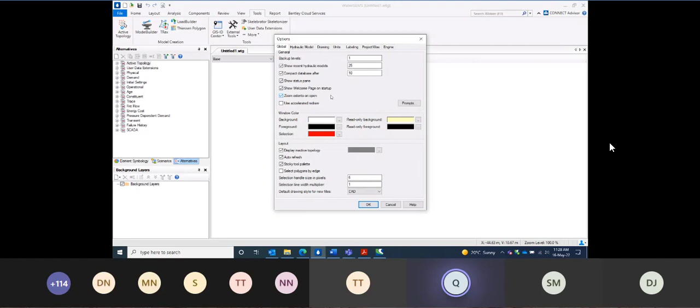Okay, yeah, then continue, Dean, yeah, units. And yeah.

Default unit system for new hydraulic model, SI. Reset defaults, SI.

Yeah, and that's it, so okay.

Yeah, that's okay, excellent. So back to home.

What we're going to do now is import some files so we can build our model, and then we're going to modify the model, run it, check the results, and rerun it with some changes.

Home, and then all the way out here, model builder.

In model builder, go ahead and select new.

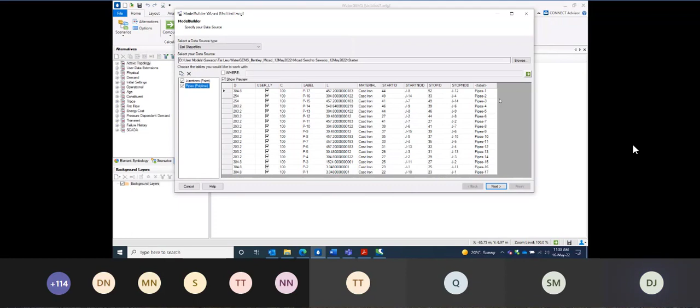Okay, next, make sure you change the coordinate system to meters.

Yeah, okay, and next. Yes.

Oh sorry, just go back. Yeah.

Just make sure this one is checked: create nodes if none found at endpoint. Yeah, and next.

This screen we don't need to worry about, because this is regarding model building for a second time. So next.

Yeah, this is all correct. Current scenario and label is correct. So next.

Okay, so now we need to do table type, junction is correct. And then key field we want label.

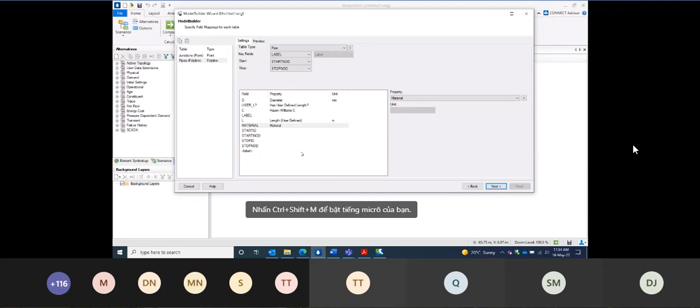That's all done? Yeah, please wait a minute.

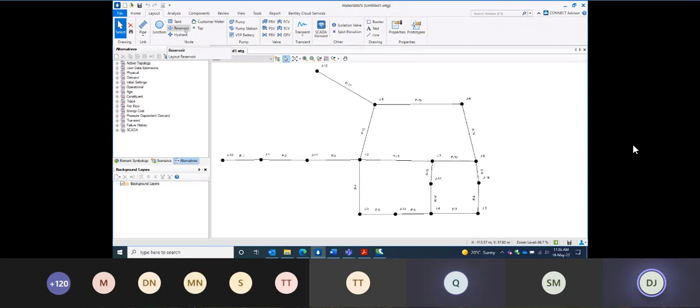And then junction 10 out on the left, click right on top of it. It says, would you like to morph junction 10 into reservoir? Yes.

Yeah, this way. Yeah, I have explained for SAWACO.

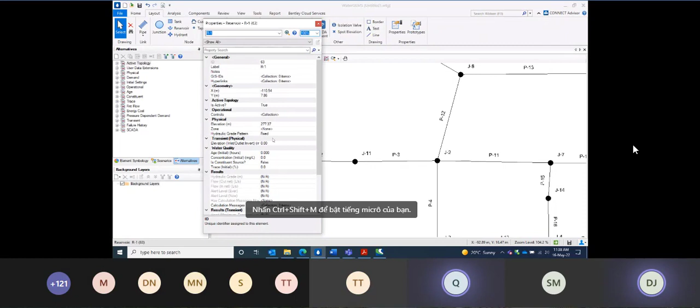And we need to change the elevation. So the elevation here needs to be changed to 289.56.

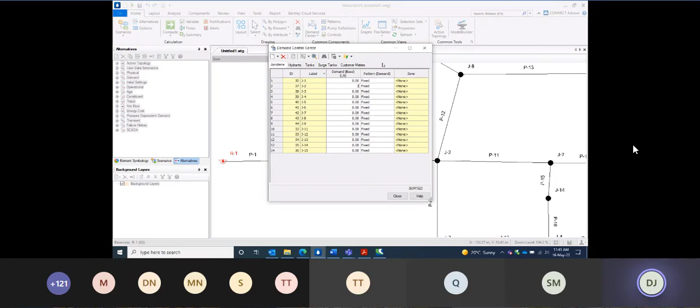And now we need to fill out the table. So you need to copy down these values. Done already? Yeah, done.

So you can close that down, and now we need to morph the other elements. So the next one is on the layout tab again, and pump.

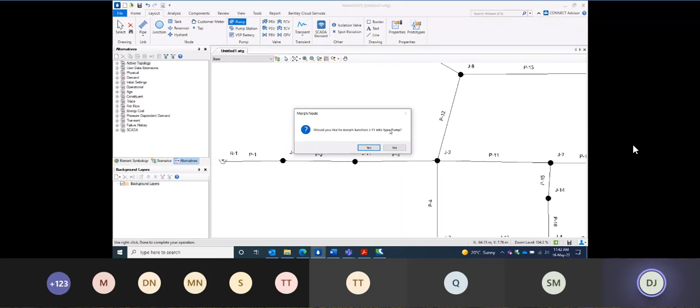Pump is junction 11. So click on top of junction 11. Would you like to morph junction 11 into a pump? Yes.

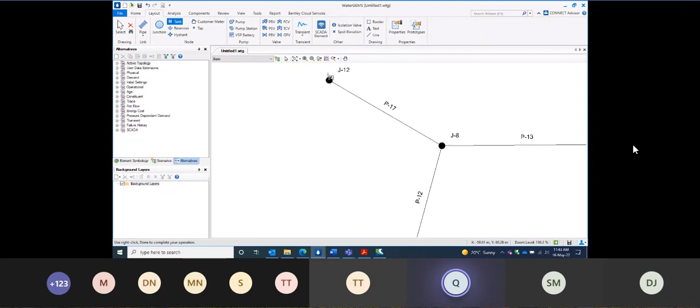Okay, so if we zoom out, and go back up, this time tank. The tank is junction 12. Go ahead and click on junction 12. Would you like to morph? Yes.

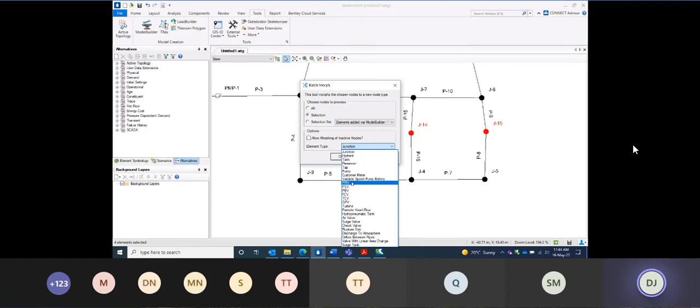Okay, so go back to the select toolbar. And then need to use the control key. So hold down control and select 13, 14, 15. And then go to Tools, More, Batch Morph. So open up Batch Morph and Selection, and the element type that we want to morph to is PRV. And then OK.

Yeah, okay. Yeah, sorry about that. Yeah.

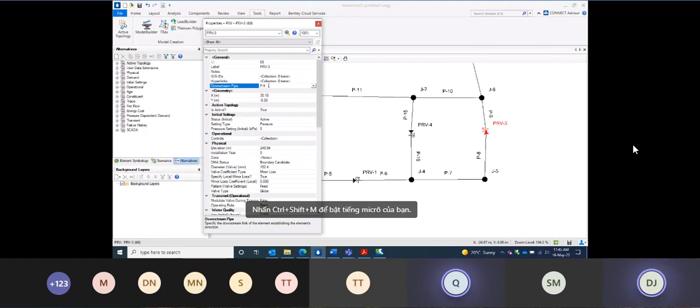So now we need to make sure that the PRVs are facing the correct way. So you come over to PRV 3 on the right and open up the properties. See the downstream pipe here is pipe 9, which is facing the wrong way. So what we need to do is reverse it. Go ahead and click reverse, and it will turn it around so that it's now facing pipe 8.

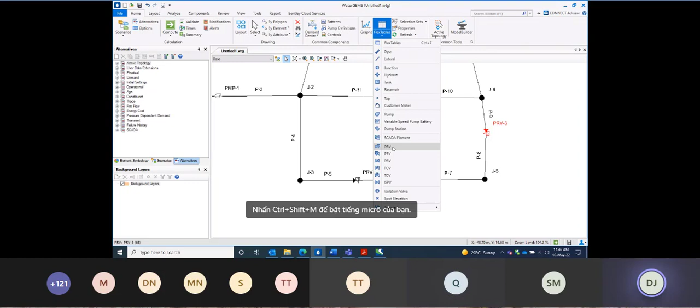Okay, so now we need to use the flex table to put in some values for the PRV. So if you close down the properties and then go back to the home tab, and then flex tables, PRV.

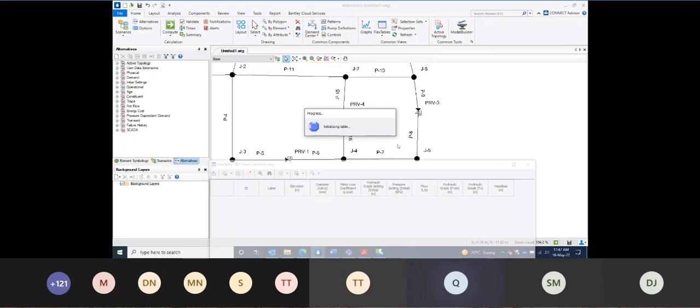Oh. Hang on a sec, just change mine back to a tank here. Okay.

So now we need to put in the hydraulic grade setting, and also the diameter of the valve. So the diameter of the valve for all of them is 100. And then the hydraulic grade setting as well.

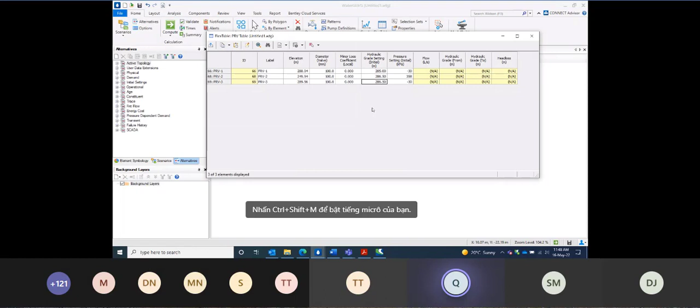We need to check the elevations. So, 249.9, 253, 253.

Yeah. All done? Yes, all done. Okay, so close that down. Sorry, mine are the wrong way around. I'll just... no.

Yeah, it's fine. Okay, so now we need to go and put in a pump definition. So next to Demand Control Center, we find pump definitions. And then create a new one. And then we need to enter some values.

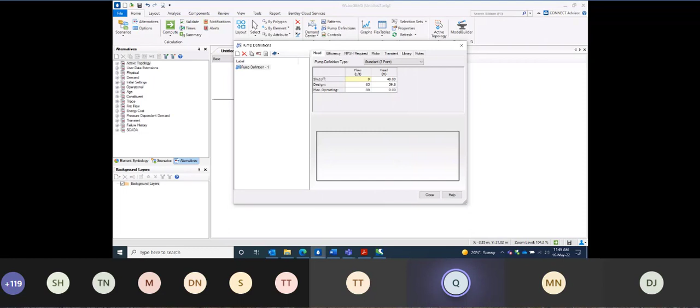Okay. So if that's done, you can click close. And then go to the pump. Open the properties. Yes, and set the pump definition to pump definition 1. We also, so once that's done, that's all. You can close down.

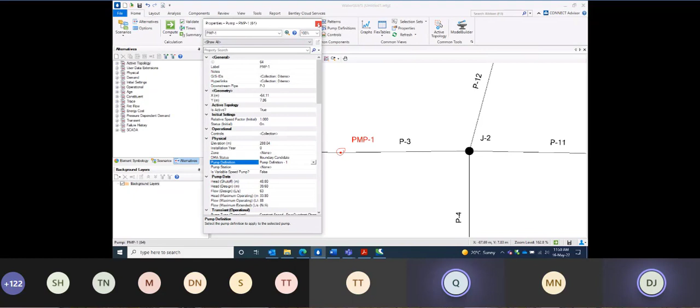And then go to the tank. Yes. So the tank, we need to enter the elevations. So you need to copy down these.

Yes. Okay, so yeah, okay, yeah. Once you've entered all of those, you can close that down and then click compute.

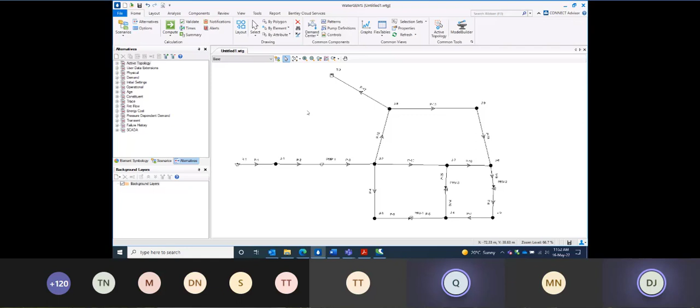Yes. So now we can look at some results. So the first thing that we need to notice is whether or not the tank is filling or emptying. Yeah. And then we also need to notice down here whether PRV3 and PRV1 are actually operating.

Yes. Yeah. Okay, so we're ready to move on to the next portion, are we? Of this workshop?

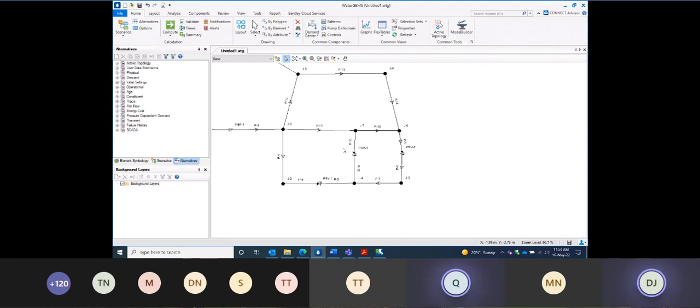Yes. In this session, we can finish. Sorry. Sorry. For this... yeah. Are we finished here? No, there's still a little bit more to go. Yeah. Okay. Yes, please. Okay.

So now what we're going to do is add an additional demand to see what happens to the system. So as you can see, the flow is going into the tank from the arrow, which means the tank is filling. And so what we want to do is put an extra demand on, and then see if our tank is still filling or if it's emptying.

Yeah. So on the alternatives tab here, which is already docked on the left, you want to go to demand, and then expand demand from base demand. Yeah. And then right click new child.

Yeah, so the child, I'm going to say average plus industry. Yeah. And then double click average plus industry. Yeah.

And then go and find junction 5 and highlight junction 5. Yeah. Change the demand base from 3.2 to 95. Yeah. Close that down.

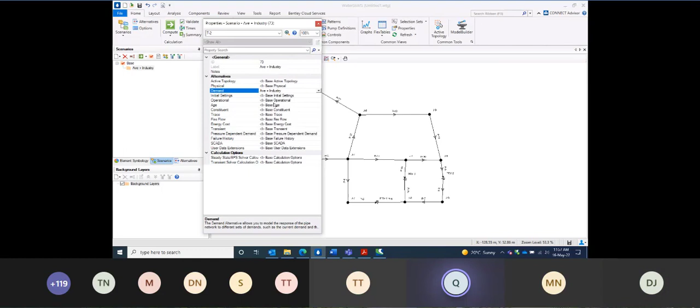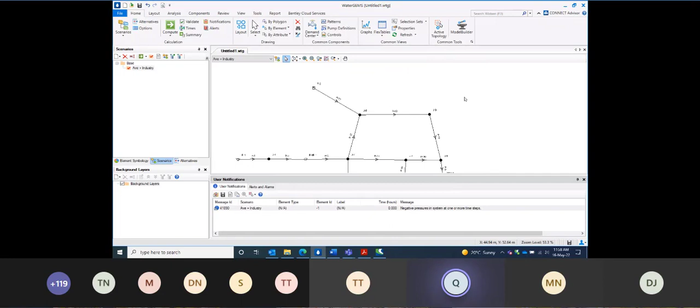Close that, and then right click make current. And compute. Yeah. And you should find that the tank is now emptying.

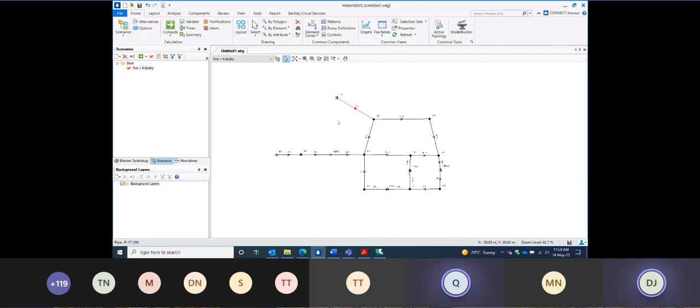And so that's it. That's the finish of the first workshop. Yeah. So are there any questions or anything, or should we take a break now before the second workshop? Yeah, okay. Yeah. Please take a break in about 15 minutes.

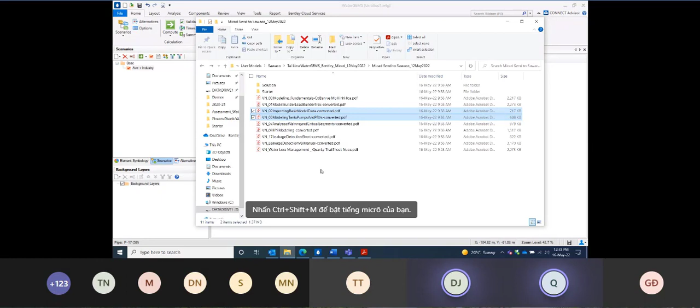And then the next one here where we do our fundamentals, we're actually going to draw that out ourselves. So rather than import it through Model Builder, which is easier, we're going to draw it on our own.

Okay, so if you go back to WaterGEMS here, all of the solution files are available, so you don't need to keep this. What you can do is just close it down. And do you want to save it? Either yes or no, but for me, no.

And then create a new blank hydraulic model.

Okay, so if you go to the PDF, because this is our second one as far as the workshops, we can skip some steps, so we don't need to - oh sorry, just give me a second here.

Yeah, sorry about that. So we're going to skip the steps where we need to change the units and everything, and we can go straight to step 6, which is where we create a pipe prototype.

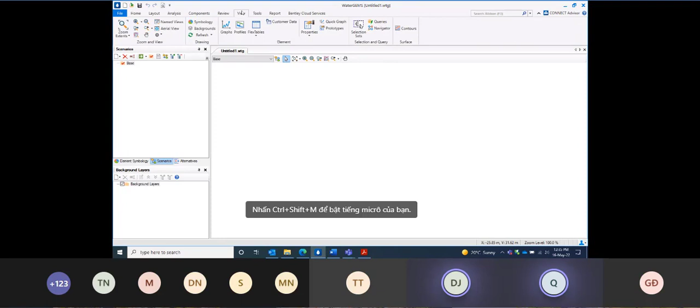So to do that, go to View, Prototypes. And then with pipe highlighted here, click New. And double click pipe prototype 1.

And change the diameter to 150.

And the material here, if you click into material, see ductile iron, and then you'll see the ellipsis on the right hand side. Click the ellipsis, and that will take you to the engineering library.

Now, the library comes with the product, but you can also add your own library if you want to. So if you have a preferred supplier, say Vinadex or Steel Pipes or someone like that, then you can add the library into the engineering libraries.

Otherwise, we have a built-in library which you can access by using the plus, and there you can see the material library. The one that we want is PVC.

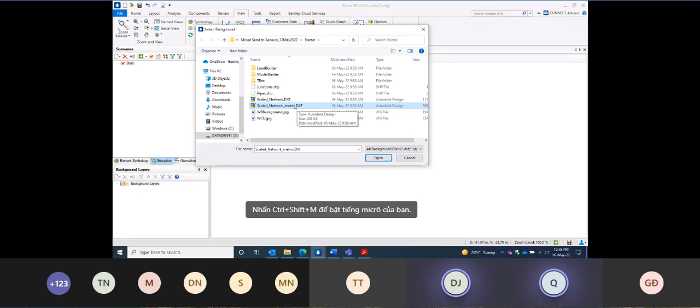So down to the bottom left here, in background layers, and new file. The one that we want is in the starter folder and scaled network metric. Okay, click OK, and then you should find a background.

Alright, so now we need to lay out the network. So before we do that, I'm going to give you a chance to do a practice.

So if you come up firstly to the tools tab, more options.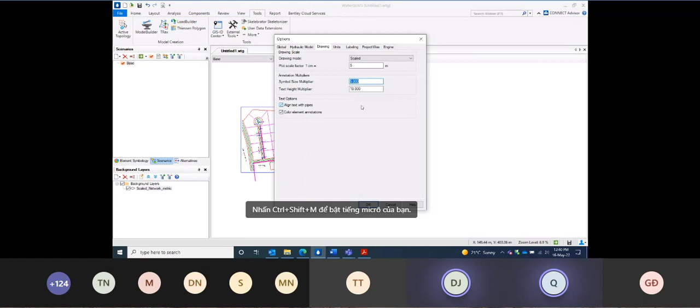Okay, so if you go to the drawing tab, I need to change the symbol size multiplier to 5, the text height multiplier to 10, and that's just because of the scale of the background that we're using. So like I said, we'll change these multipliers, and then we can do some practicing, and then we'll delete those, and then we'll draw it out properly. So symbol size multiplier 5, text height multiplier 10, and then OK.

Yeah, that's okay. Okay, so go up to the layout tab, and you see that we've got all of the elements listed here. So if you select any of the elements to the right here of pipe, so for example junction, you'll see what happens if I place junctions.

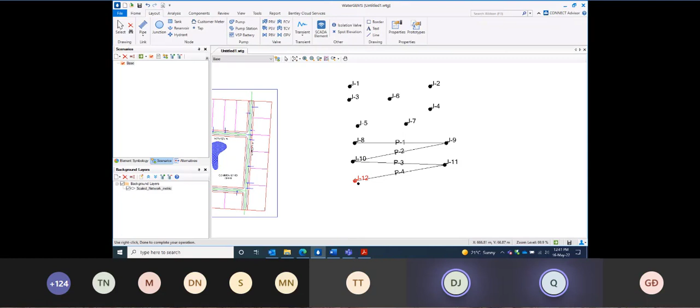You see that when I place them, there's no pipe. So it's just placing an individual junction with no pipe. So to place a pipe, you always need to use the pipe tool here. So the pipe tool, if you click on that, you'll see it will do the same thing - it will place junctions, but this time it has a pipe connecting from junction to junction.

Yeah, so if you right click, you can change the type of element that you're placing, and then right click, and you can place various things. So pump, and then change it back to junction, and right click and left click.

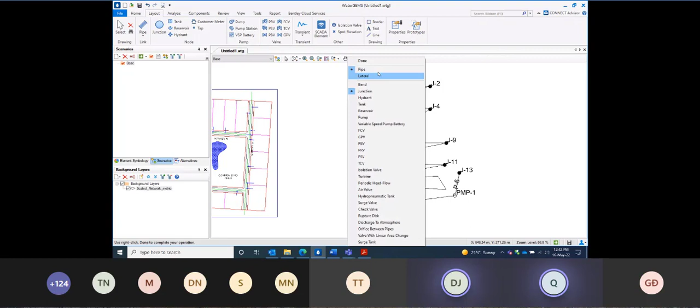If you click done, it will disconnect from the element, and then you can rejoin things with the pipe tool as well. So you can connect them, right click done, disconnect, connect in, reconnect, right click done. I'll just give you a few minutes to practice the right click and left click buttons.

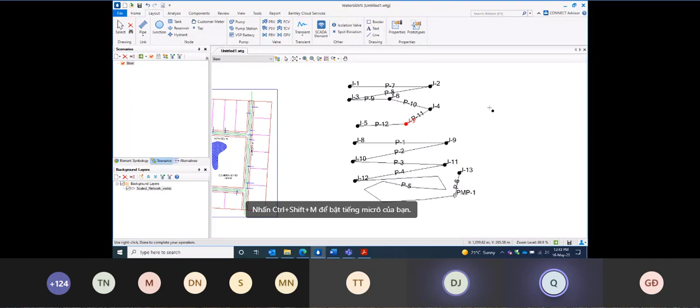Yeah, we can continue. Okay, so you go done, it goes back to select, and what I'm going to do is just draw a box around the whole thing and delete.

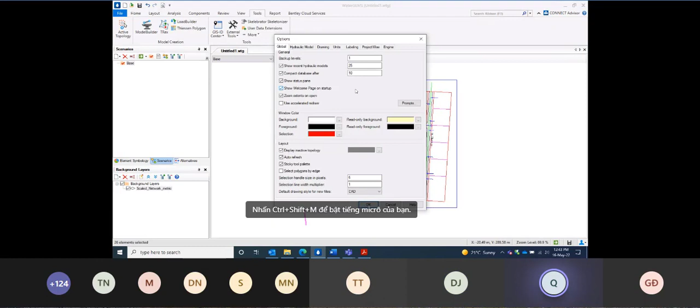If you were like me and you practiced, then we need to reset our drawing labeling system. So go to tools, more, options, labeling, and then reset. This part isn't in the PDF, it's just a bit extra because we had a practice. If you didn't practice, you don't need to do that, but you just need to reset them so that they all go back to 1.

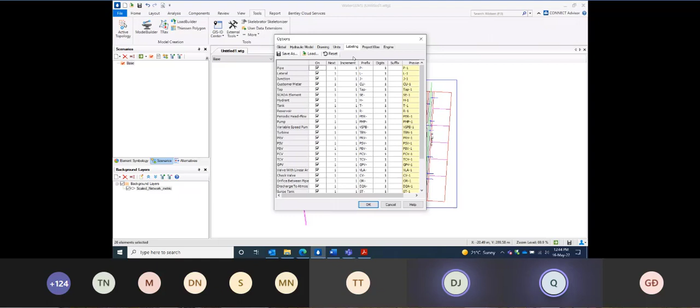That's okay. Okay, so, okay. And then back to the layout tab and the pipe tool.

Now, what we want to do is come up to the top right here and right click anywhere. So right click, change to tank. And then up here in the top area, go ahead and place, using the left click, a tank. That's okay, yeah.

Alright, so right click again, and this time change it to junction. And then place junction 1 up the top there. And then down to the next intersection here for junction 2.

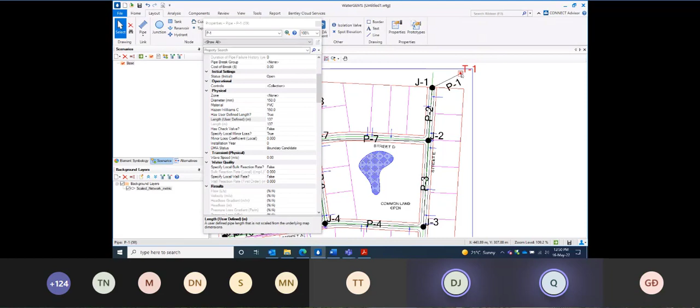So now we need to enter the elevations of the tank. So 198.1, 198.1, 202.7, 207.3. Also, down further in the physical area, we need to enter the diameter, which is 15.

Yeah, yes, okay. Okay, so if you close that down, and then go back to the Home tab, and under the Flex tables, you'll find the Junction table. And the junctions should be listed from 1 to 9 in order.

What you need to do is enter the elevations and just copy them down. Just give you a minute to copy those down. Yeah, 1 minute. Sure.

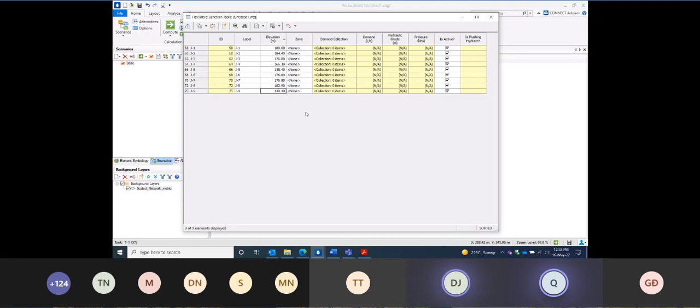Now of course we need demands, so demand center, demand control center. If you open up the demand control center, you'll see there's none there. So what we want to do is go to the drop down here for new, initialized demands for all elements.

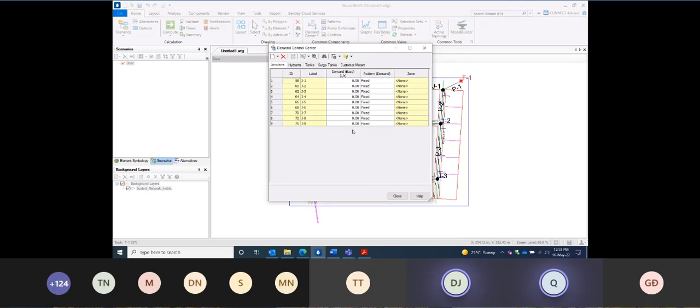So what we need to do is fill in the 9 junctions. However, they're all the same, so rather than typing them in, there's a quicker and better way, and that's the global edit. The global edit function is extremely valuable and will save a lot of time. So if you go up to the top, demand base, and right click, you'll find global edit.

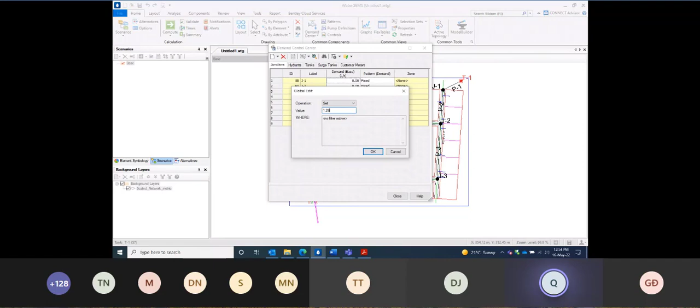And set value 1.26. It's okay. So, okay, and of course they should all be 1.26 now. And close. Once you've done that, you can go ahead and click compute.

Okay, so now that we've computed it, we have results available, and what we're looking for here is some particular results, and that's junction 6. So we're interested in junction 6 and the pipe leading into junction 6, which is pipe 6. So the first thing I'm going to do is just click on junction 6 to bring up the properties.

Then scroll down, and here you can see the pressure. You see that the pressure is 25 meters head, so 25.21. So there is a lot of residual pressure here at junction 6.

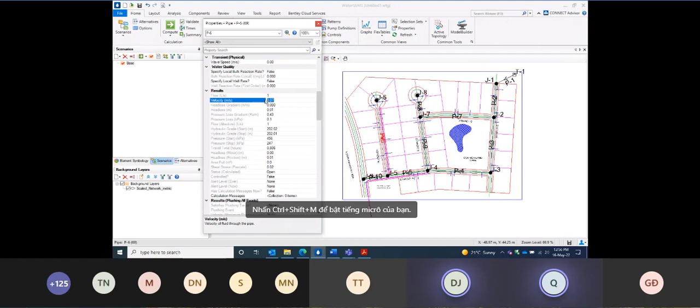And then I'm going to click on pipe 6 and do the same thing, scroll down to the results, and then you see the velocity here, 0.07. Okay, so all we need to do is just remember those values. So 25 meters and 0.07 meters per second, and we can move on to the second part of this, which is when we put an extra demand on, and of course then we'll check the results and see what happens.

So close down those properties, and now we need to go and do the same thing that we did in the last part of the first workshop, which is go create a new alternative, a new scenario, put them together, and then we can run it and get different results. So then firstly over to the alternatives.

And then in demand, from base demand, we want to right click and new child. And then in the base demand alternative 1, I'm going to put fire flow at junction 6. We're going to add a fire flow here and see whether or not our system can handle that extra demand.

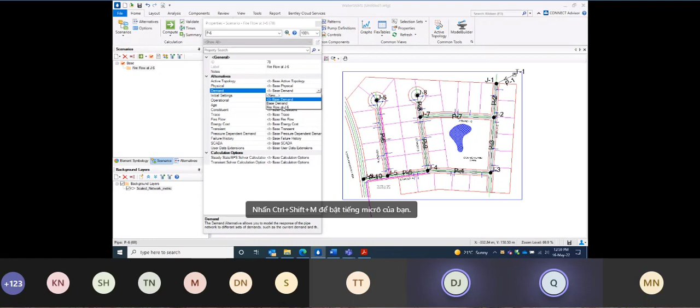Now the most important thing is that you need to use the make current button here, or you can right click and say make current, or you can use the drop down here to make it current. Once you've done that, compute.

Okay, so you see that we've got an error message down the bottom. The error message says that basically our system can't meet the pressure or the flow that we're trying to get out of it. So I'm going to do the same thing as last time.

I'm going to go to junction 6 and check the results. And you'll find that now, instead of 25 meters of pressure, we have minus 19 meters of pressure. So obviously, if it's minus 19, minus 18.6, that means we're not delivering the flow, or we're unable to deliver the flow.

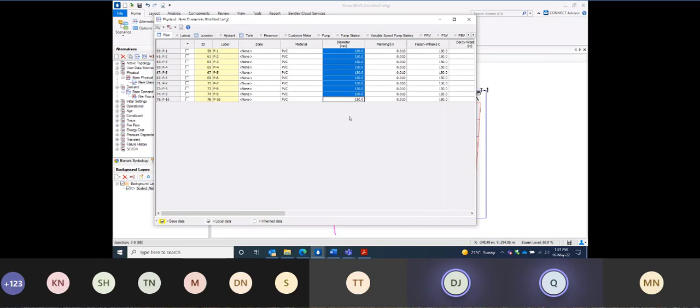So double click on new diameters, and you'll see here that the pipes are listed, and then we've got the diameter column here. What we're going to do is change some of these diameters. So firstly, pipe 1, change from 150 to 250. Same with pipe 2. And then pipe 3 to 6 are all 200. And then the rest we can leave the same, 150.

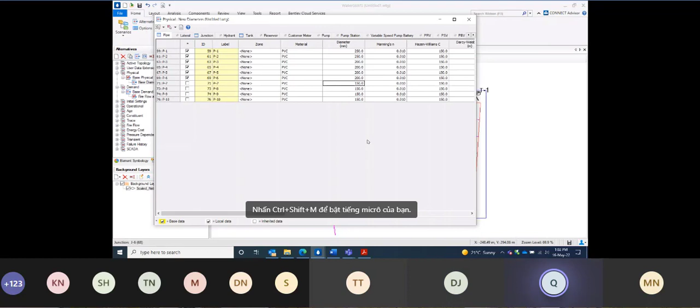Okay, close that down. And then we of course need another scenario to put that in. So back to these scenarios, and fire flow at J6, right click, new child. This is called fire flow with new diameters.

Open up the properties and you'll find that fire flow at J6 is already set for the demand, because we inherited it from its parent - since we took a child, we inherited that. Of course we need to change the physical alternative though, so go ahead and change physical to new diameters. Don't forget to make it current, and then compute.

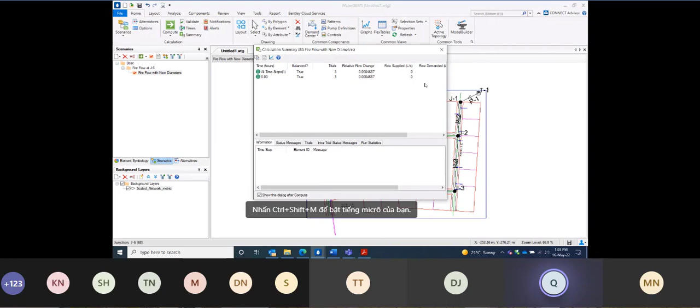Okay, so once you've computed it, you can go back to J6 and check the pressure. You'll see that now, even with a very large fire flow, with the increased diameters, we're able to get 16 meters of pressure, whilst also meeting the demand, which is 63 liters a second. You can check the velocity too if you want - it's over 2 meters per second.

Any questions regarding that workshop? Because that's the end of it.

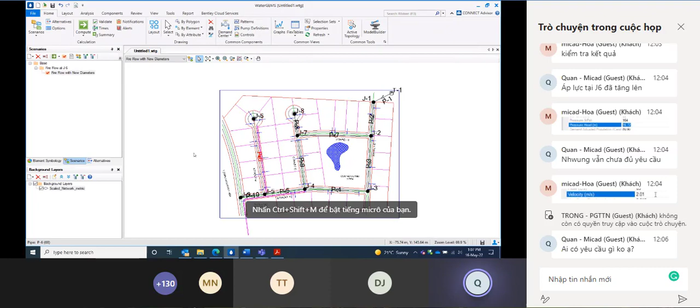For now, have no questions. Yeah, we can continue. Okay.

So obviously that's another workshop finished for today. So we've now done 3 workshops, and for some reason there seems to be 2 of the same listed here, and this one's a PowerPoint presentation, not a workshop. So I think probably for today we should do one more and then finish, and complete the rest tomorrow.

So do you want to take a break now to go to the bathroom before we start the next one? Yes, okay, we take a break. About, yeah, what minutes? Is 15 minutes okay? Okay, 15 minutes, thank you.

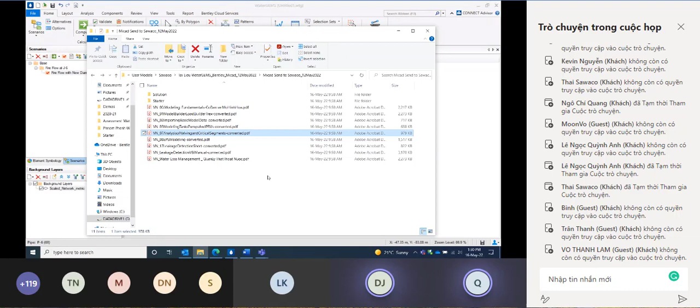So analysis of valving and critical segments is the next one, and basically what we're going to do here is investigate a network with isolation valves in it to see whether or not the isolation valves have been placed in the correct spot, or if we need more, or more interconnecting pipes. To open that up, close down the last one, then go File, Open, and in the Starter folder you'll find Criticality - go ahead and open that up.

Okay, so first thing you can see we've got the original valves here, so if you zoom in and around, you'll find these isolation valves placed at various spots around the network. If you check the layout tab, you'll see there's a valve section here, with PRV, flow control, throttle control, general purpose - each of these valves breaks the pipe.

However, the isolation valve is over here on its own, because if you check the isolation valve, you'll see it has a reference pipe, but if you click on the pipe, you'll see it's one entire pipe - the isolation valve has not broken the pipe. So each of these pipes is just one pipe with a valve on it, not broken into 2. That's the difference between this valve and the other 6 valves, which is quite important, because you want to make sure your GIS valves and your model valves are the same - either they break the pipe or they don't.

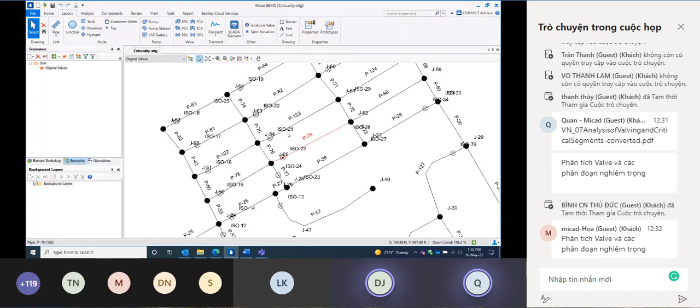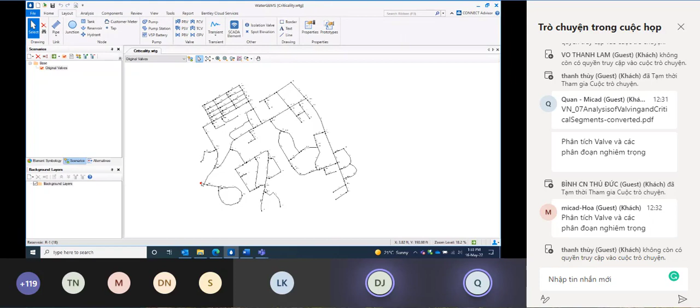So what we want to do is go and investigate the valves as they're placed now. Before we open it up and run it, the important thing to note about this particular system is that down the bottom left we have a reservoir. There's only one reservoir in this model - no tank, no second reservoir, so there's only one water source. That's very important, because if we close off the valve to the reservoir, then the entire system will be out of water.

Okay, let's go and start criticality. The analysis tab is where you want to go, and then on analysis you find criticality. Once you're in criticality, click new, critical pipe segments, and we want original valves - just tick on original valves and click OK. The scope type here is entire network. Once you've selected entire network, go ahead and click compute.

Okay, so the first thing you can see is that it's broken up into 51 segments. Now, these 51 segments, if you want to know what they look like, just click on the coloured pie here, then click highlight segments. Once you've clicked highlight segments, just click minimize and you'll see your color-coded network here.

So if you zoom into an area, you see, for example, this red area here, you can see that this is one individual segment broken by this valve - a very clear example of one segment, one valve. Then you go to a more complicated one, like this segment here has a valve here and a valve here, so you can shut off this portion or this portion or this portion. You can see they get varying complexities as you go around and see where you can valve the system off. You can see this blue one here, you can close off this entire segment.

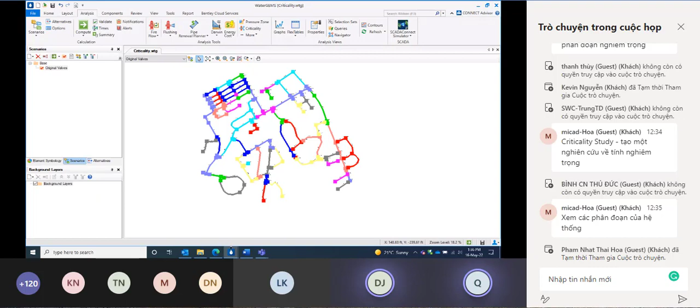Alright, so back to criticality. And then over on the left, go to outage segments and click compute.

Now the thing we're interested in here is if you go over to the right - for some reason this is in feet, so just close down criticality. Go to tools, more options. If you open up the options, go to the Units tab, and you want to reset defaults here - reset defaults SI.

It doesn't change anything about the model or the project, it just means that someone's changed the units in this particular model. So click OK. Go back to analysis, back to criticality.

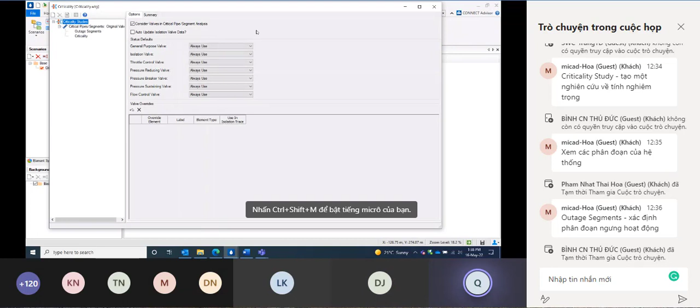Okay, this time over to outage segments and scroll across to outage segment length and right click sort descending. So you can see here that segment 46 has an outage length of 11.8 kilometers - that's how much pipe would be out of water and needs to be drained if that particular outage segment was to be shut down.

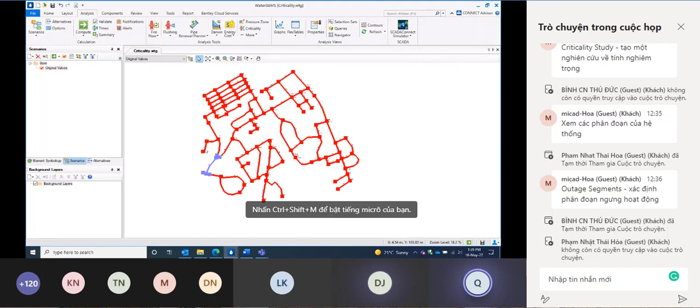So if you want to take a look at outage segment 46, scroll down in the middle, highlight segment 46 and then click the pie. As I mentioned earlier, you see that the reservoir here has been valved off, which means that the entire network has run out of water.

However, if you go back to criticality and back up to all segments, see the second worst one here is nearly 5 kilometers - outage segment 41. So again, I'm going to go and find outage segment 41.

And then you can use the refresh button here, and then minimize. You'll find that this particular segment here, segment 41, if you shut this particular area down for a burst or a repair, this whole red area is going to be out of water, which is nearly 5 kilometers.

Okay, so back to criticality, and now over to the actual criticality on the left. First thing, before we compute it, I'm just going to tick run hydraulic engine, then compute.

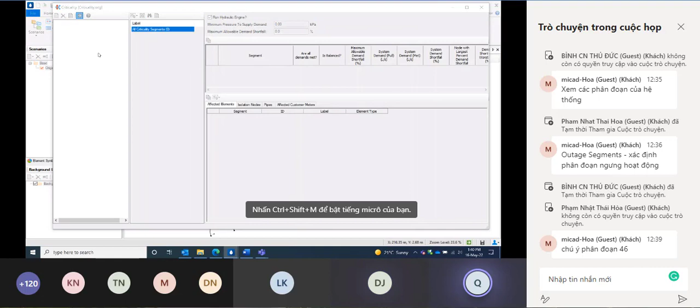Okay, so this time we want system demand shortfall percentage. I'm going to again right click sort descending, and you see the same two segments here. Segment 46 is of course 100% of the entire network, and then you've got segment 41 here, 45% of the customers on this network are out of water.

Alright, so what we need to do is go and fix it. We need to put in a new pipe so that we can get this second worst segment here down from 45% to obviously lower than that. So close criticality and go to the alternatives, and from original valves in the active topology, right click new child alternative, which is going to be named new interconnect.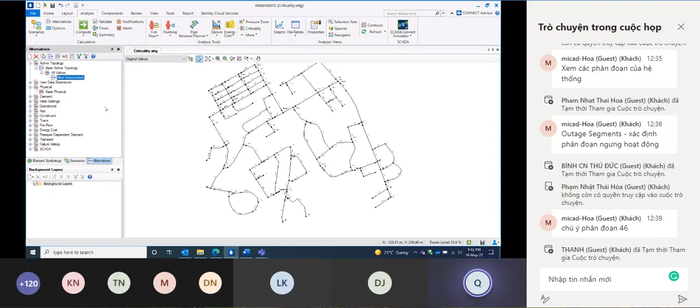Back to the scenarios. From original valves, we'll take a new child called new interconnect. Open up the properties of new interconnect, change the active topology, and make current.

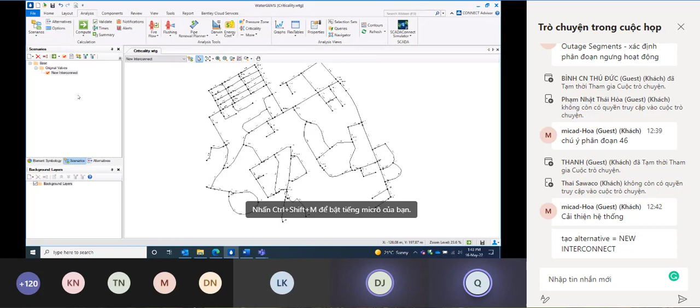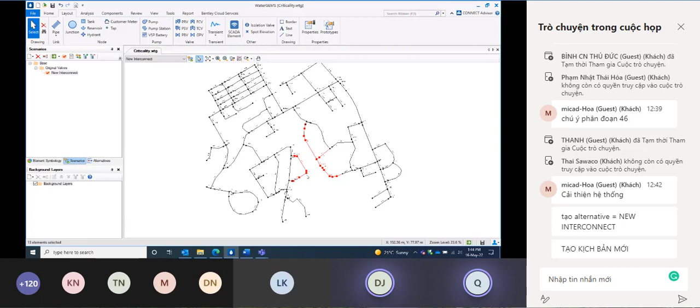So new interconnect here, go over to the layout tab. What we're going to do is draw in a new pipe and then put some valves on it. The area we're interested in is down the bottom. If you zoom into the bottom area, you find junction 45 and junction 44.

Using the pipe tool, just connect junction 45 to junction 44, and that's it, done. Now we need to place an isolation valve on it, so click on isolation valve and place one at either end. You need to make sure you click exactly on the pipe. Would you like to attach the pipe? Yes. And at the other end as well? Yes. And that's it, done.

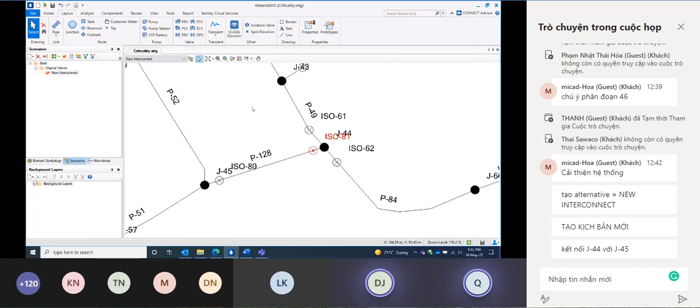So that's it, we can go back and test it. Back to analysis and criticality. Create a new one and tick on new interconnect. Click OK. Scope type entire network. Compute.

Alright, so you see that we've already got an extra segment there, then outage segments, compute, and then outage set length, sort descending. You can see here that outage segment 46 is much less than the 5 kilometers that we had previously.

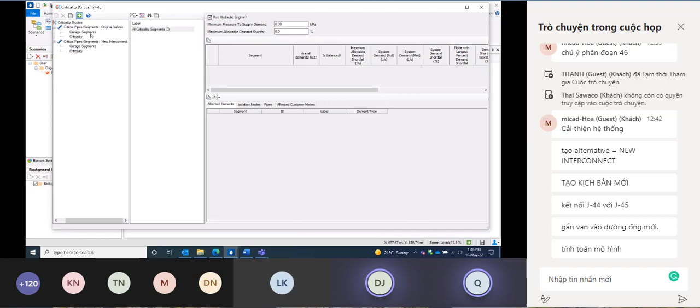It's now down to less than 1 kilometer. So you can also do criticality, run hydraulic engine, compute, and system demand shortfall percentage. You see it's now down to 25%.

That criticality is, as you can see, a very simple, quick feature to use. It's very, very easy to set up, and it's not in this workshop, but if you go to the tools menu and then more, you'll see this feature here, assign isolation valves to pipes. So if you use Model Builder to bring in isolation valves, you don't have to manually assign them. You can automatically do it using assign isolation valves to pipes. That's important because you may have several thousand pipes and or isolation valves that need to be assigned. So that tool can do them all automatically for you. A very important tool, and a very easy, simple tool to set up and run in criticality.

We have a question from Mr. Khoa, who asked whether we can add a single valve for a pipe instead of 2 valves. Yes, absolutely, yes of course.

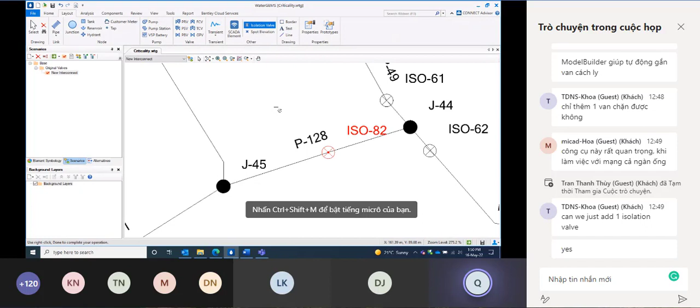But it's a good question, because we added 2, one at each end. We didn't need to, because of course we can shut this pipe down either way. So there's really no need to put 2 on that pipe. It's a very good point.

Yeah, that's good, thank you.